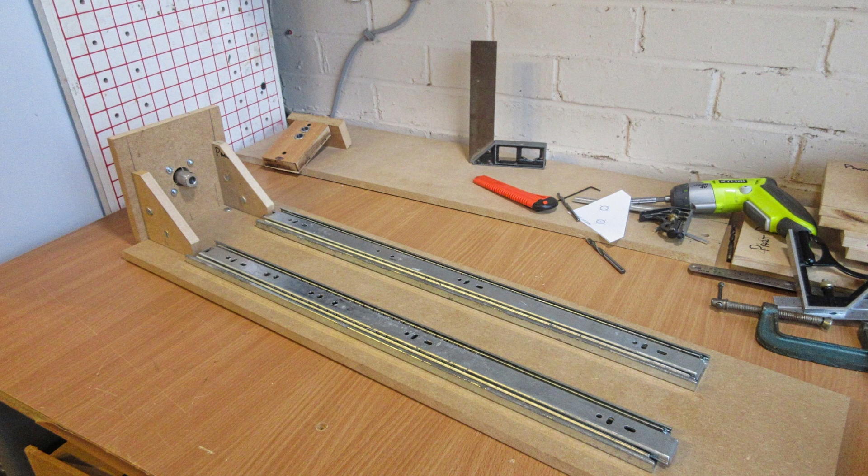You soon find you spend more time on the software. I always say to people getting into this side of things that building the machine isn't that difficult, because once it's built, it's there. Where you spend 90% of your time afterwards is in the software, getting the design how you want.

So in this video, I'm going to show you how to use DevWing Foam. We'll actually make a flying wing, but a slightly different one this time, because I've got tutorials on flying wings done with the older software, and I'll put a link to that if you want to have a look as well.

So I've been flying radio controlled planes for about 20 years now, and I've got all sorts. You might have seen some of my videos before with the sort of things I've been flying, from airliners to little Depron models.

Through the years, what I've found is that I get more enjoyment from the models I've actually built myself from a kit or done from scratch, like my Hawker Hurricane, which was completely done from scratch in foam, and a few other models as well.

My VC-10 airliner was another one that was a big project as well. Quite challenging projects, but very rewarding when you see the things fly.

When you buy a kit, put it together and fly it, you do get some enjoyment from it. Personally, I don't think you get the same sort of buzz from it as something you've built yourself.

So in this tutorial about DevWing Foam, what you're going to need is a CNC foam cutter, using a hotwire here to cut through the foam. Now, if you haven't got one, I've got a whole video series on how you can build one right from the start.

And it's not as expensive as you might think. You can probably build this foam cutter here for about $200 US, or about £160 UK.

And if you've got some parts already, probably even cheaper. You don't have to do it exactly like this. I mean, I've got plans for these, where there's a small charge on the website for the plans.

But a lot of guys have put their own interpretation on it, and some of them are using a lot of 3D printed parts now. So there's a builder's gallery on the website you can have a look at, and there's some really interesting takes on the design there.

So why would you use DevWing Foam, which isn't a free program, when there are free options? Well, I've used them all. There's one called Wing Cutter in G code, I think - have I got that right? I'll put the right name up for it anyway.

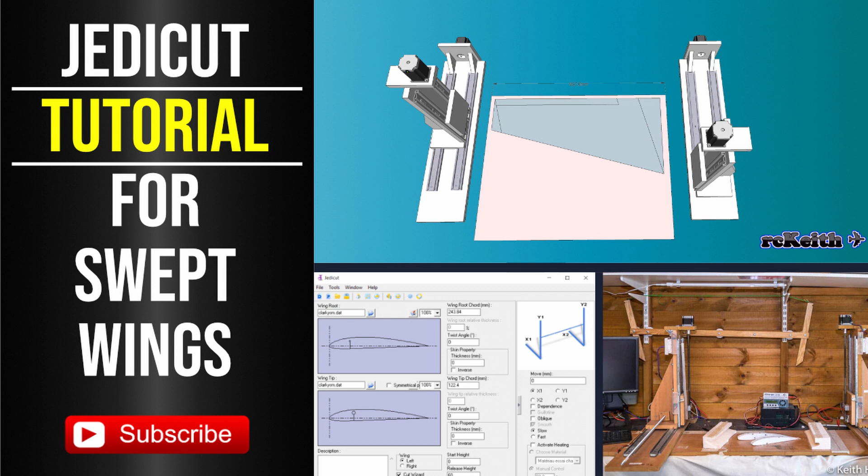I put the free ones on my YouTube channel because not everyone has the money to pay for it, and if you do want to do something like this, the free ones are good enough to get you going. And once you see what they can do, you might think, well, perhaps it is worth buying the paid versions.

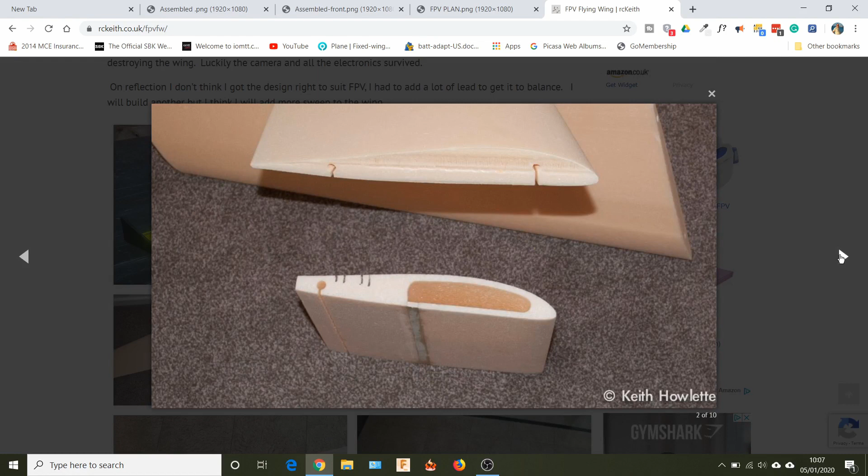So what I did then, I built a bigger wing, and this was the build of that, and it came out quite well actually. You see the carbon rods there, and it going together, using my favourite covering method, brown paper as usual.

But the only problem was I don't think I got the design quite right, and I don't think the wings are far enough back. Although you can't see it on any of these pictures, I had to put a load of lead weight up the front to get it balanced. I got the battery as far forward as I could, and then I still had to have a massive piece of lead weight, and it never did fly very well.

I even tried a Hobby King gyro on it. So after the third flight, I smashed it up completely. Luckily, the FPV gear survived.

I thought this time I'd try and have another go at doing this, but with a slightly different model with a better design. So this is what I've designed up, and the wingspan is about 950 millimeters. I think that's about 38, 39 inches, something like that.

And it's got this center section here, and it's using two different aerofoils. So it's in three parts: we've got the outer wing sections, the middle section here, and then this section here. Now this section, the white section here, that's because we're transitioning from one aerofoil to another.

So in the middle we're using a Clark Y aerofoil, and that's to give us a bit more room on the inside to get batteries and flight controllers and things in there. And then it goes on to a flying wing.

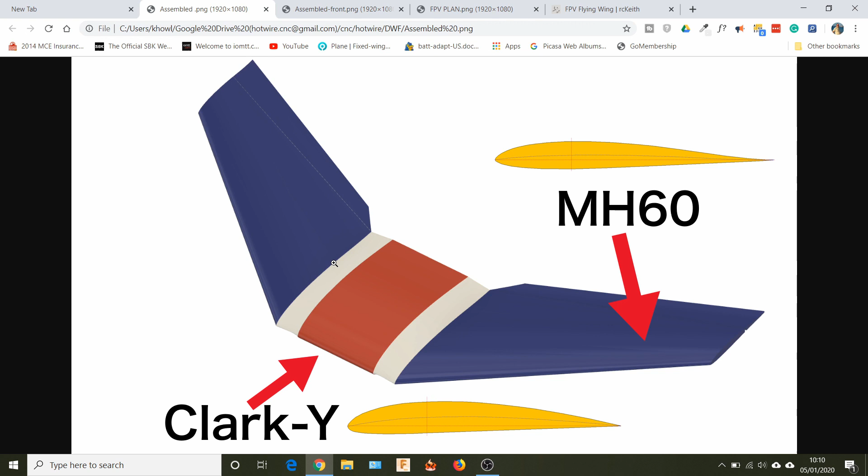So what we have to do in DevWing Foam, we use the Clark Y on the inside, and then the MH60 on the outside. If we have a look at the front, you can see that there. So we've got the MH60 there, and then we're transitioning up to the Clark Y. If you use the MH60 all the way through, there probably won't be enough room to get any gear in it.

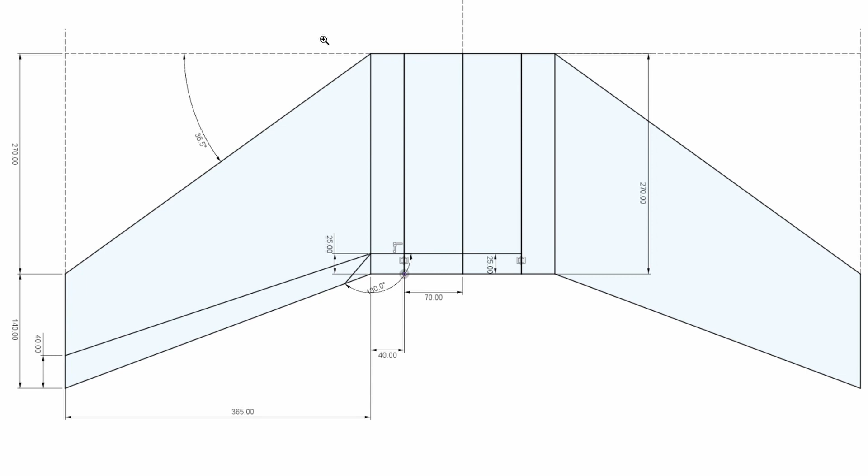So this is the actual plan for it. As you can see, all the dimensions there, we'll be using these dimensions in DevWing Foam to design the wing.

So the other way you can do it, if you want to build a particular aircraft, and one I've been thinking of doing for a little while, I don't know why it just appeals to me, is the Grumman A6 Intruder. I'll get a picture of that up. So this is the Intruder, and what we'll do within DevWing Foam, I'll show you how to use an image to get the wing dimensions. Hopefully that's going to work out quite well, and we can start to model it up in DevWing Foam.

So let's get started with DevWing Foam. What I'll do first of all, I'll just show you what will happen if you start DevWing Foam without a license.

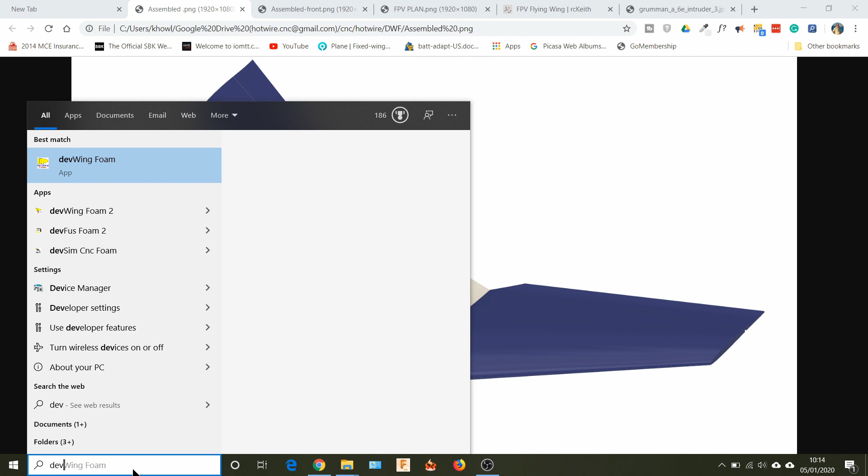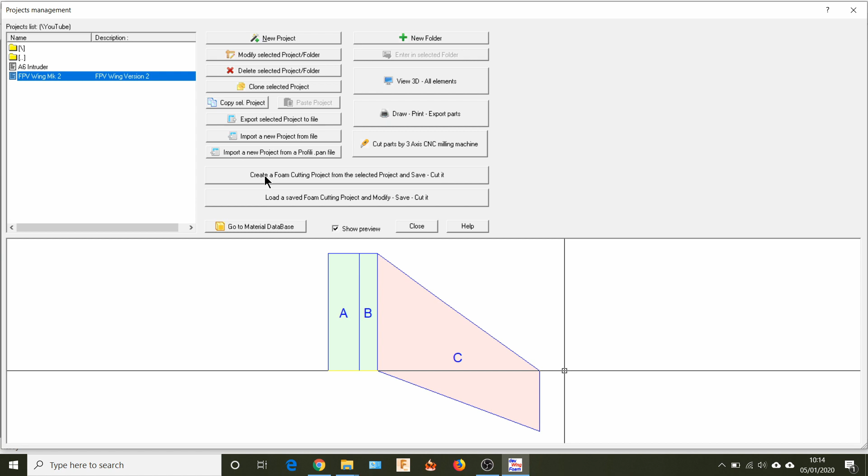So it's starting up and it's checking for a license first of all, and then it comes up here, and you can use almost everything within DevWing Foam. But the only thing you won't be able to do is generate the G code, and there's a few exports you won't be able to do either. So all you do is press continue, and you can follow along with this video tutorial even if you haven't purchased a license. Everything will work apart from when we get to creating a cutting project.

It does cost a bit, but personally I think it's well worth it when you consider how many models you can make. So all my licenses are on that USB key there.

When you get a new license, as you put the license in, it saves them onto this USB key. I didn't used to have that when I first started, and after having one or two computer failures, it's better to have one here. If you've got DevWing Foam on another computer, so a big desktop and a laptop, so long as you plug that in, DevWing Foam will work on either. You can't run them simultaneously, only on one at a time.

So we'll plug it in now. All right, there we go. So she's in now. You can see it's recognised it there.

So this is the latest version of DevWing Foam 2. This version was only just released - I'm recording this in January 2020, so it was released in December 2019. It's very new, and there's some nice features from the original version, DevWing Foam. I think it's really good, which I'm quite impressed with.

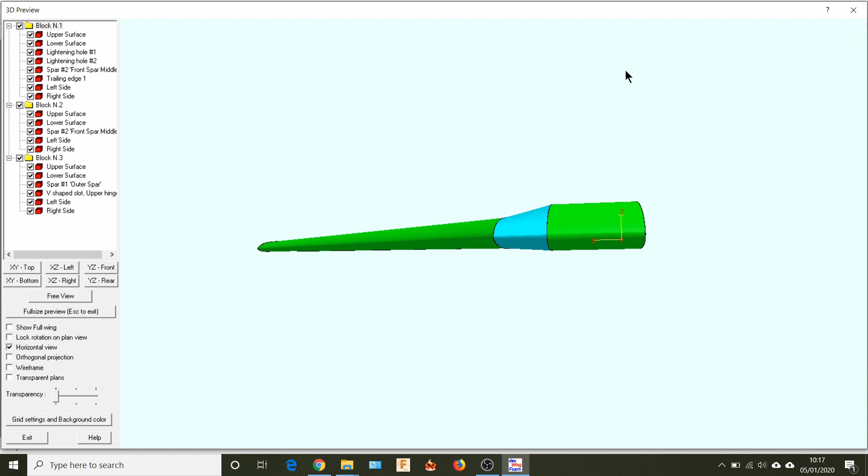So let's have a look at this flying wing, and we'll go into the 3D preview. This has changed from the last version, and you can see what we've got there. This is what we're going to be modelling up. I've already done it once just to make sure everything works, so what we'll do is we'll go through it again.

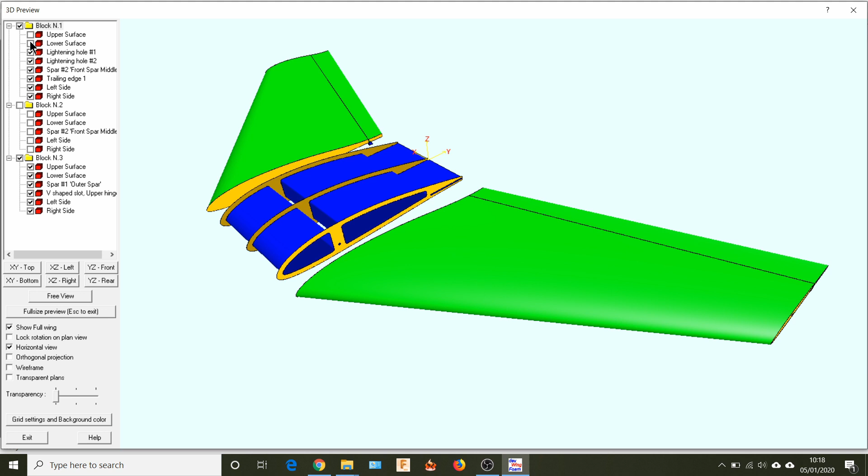The other thing you can do as well, which I quite like, is show the full wing. So if you click on full wing, we've now got the full wing there. And then you can take parts of it off as well - so that's our middle section there. You can take various parts off, and you can see the spars going through the trailing edge.

I think that's a real big improvement from DevWing Foam. Stefano's done a real good job on this. Right, so we'll come out of that.

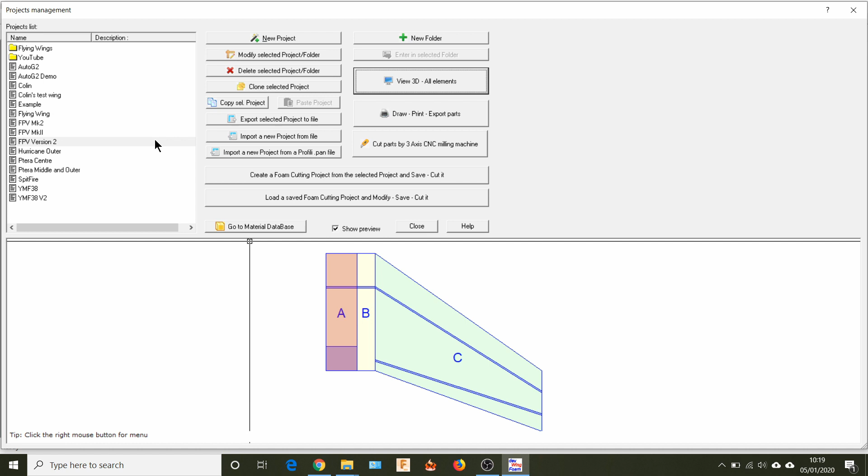A couple of other things that have changed as well - we've also got the ability now to import a project from Profili. Profili was the original one I first started with, and the majority of my wings have been built with that. The FPV wing I showed you earlier was all done with Profili, and it was good for its day. But there's a lot of improvements within when we went to DevWing Foam, and now we've gone to DevWing Foam 2, there's some really good improvements as well.

One of the big improvements to DevWing Foam 2 is we've now got the ability to add a folder. You can see I've put a couple in here - I've got flying wing in there, and I've already started designing an FPV racing wing.

I don't know whether you guys have seen this - it's what they call the spec wings. It's for FPV racing, I think it's quite big in the States. I don't know if it's taken off in the UK yet, but they're all standard spec wings that have to be built to a certain dimension. So I'm going to have a go at building one of them, just for the fun of it.

So I've created a folder for YouTube here to keep me YouTube stuff. What we'll do is start off first of all with a new project. Even though I've got this project here, what we'll be doing as well is referring to the dimensions - I'll be referring to this dimension. So let's go back - create a new project.

When you first open up DevWing Foam, you'll see these lines going across on the various windows. Red means it's mandatory, so we have to put some settings in this page. We can't go any further until we've got some settings in there. We've also got this thing called expert mode, which you can have on or off. If it's off, you have to go through a wizard mode and go through each part.

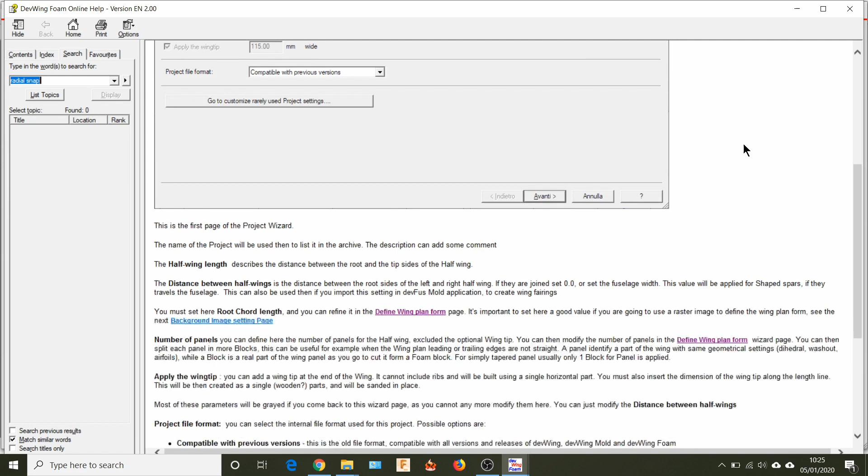So we don't really need that. There is a help on it, so the help's quite good as well. If we bring the help up, and if we go down: distance between the half wings is the distance between the root sides of the left and right half wing. If they are joined, set 0, 0. Or for fuselage, this value is applied for shaped spars if they travel the fuselage. So we're not going to need that. As you can see, the help's context sensitive, so wherever you are, bring the help up, it brings up the relevant help.

So the root chord on this is 270, I think. Let's just double check. Yeah, 270. Put 270 in there. Number of panels.

We can alter this later if we want, but we've actually got 3 panels on this. So the panels are like the wing sections. The wingtip, we can apply a wingtip, but...

This is if you've got a CNC router and you want to cut the wingtip out of balsa. So I may cover this in a later video, but for this video, to keep it a reasonable length, we're not going to cover that. So we just take that off.

And then we've got the project file format. So we can have compatible with previous versions or fast saving format. I'm going to stick with the new fast saving format. This is new in DevWing Foam 2.

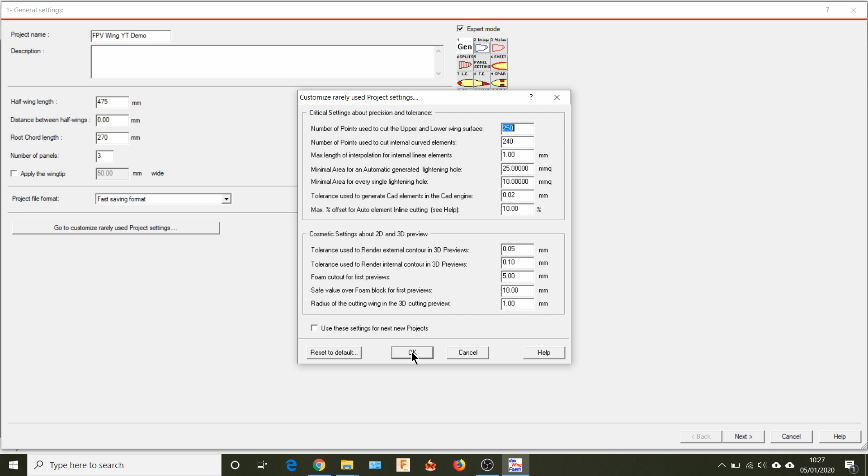Then we've got go to customize rarely used project settings. You'll see this a few times in the program. And as I said earlier, there's a lot of things in here which I've never touched, even on the old version. I think it's basically the same on the old version, and I've never touched any of these. I find with DevWing Foam, most of the default settings are pretty good. They've done a good job on that.

So if we do next. Now what I'll do is once we get a little bit further into this wing, I'll come out of it and show you how we use the image option with the Grumman A6. But we'll just skip this for the moment. So now we've got our 3 panels here.

So on this screen, what we need to do now is go in and set the correct dimensions. Basically all it's done is just split it up evenly in 3 parts, and as you can see, it doesn't really look much like our wing. If we have a look at our wing, it doesn't look much like our wing at the moment, but that's quite easy to sort out.

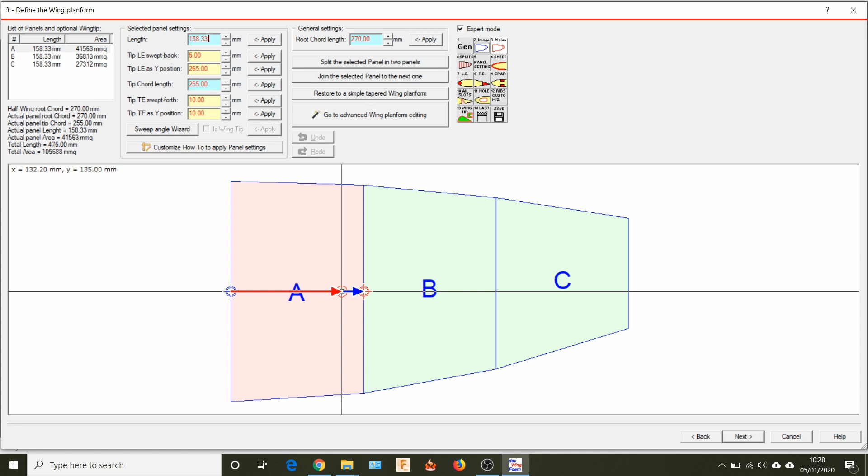What's good about this as well, if you go into each of the dialog boxes, so if we go into panel A, go to the dialog box there, it shows us where we are, and we can actually adjust this graphically if we want to. So if we just click on it, we can pull it back. If you had an image underneath, you could line it up with your image. So that's brought that back to there.

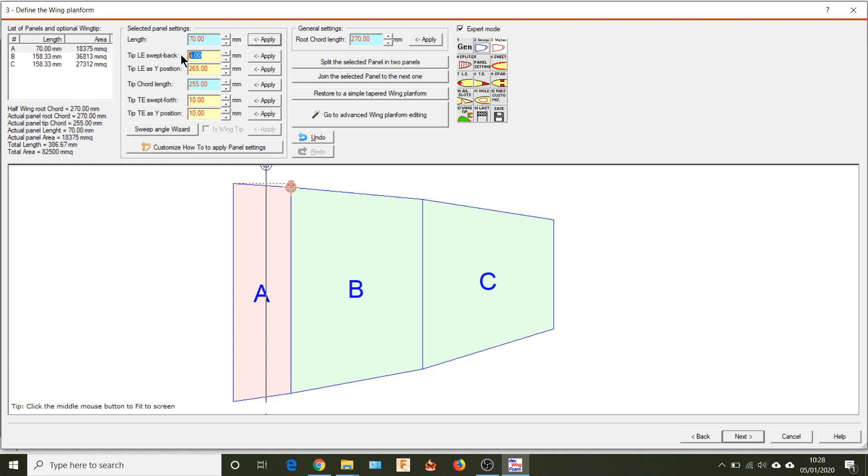And I think on our drawing, that distance is 70, so we can put it in manually. I'll put 70 in there. The sweep back, you can see the sweep back there, and we've got no sweep back, so I'm just going to type this in manually. And then the tip chord there, that's going to be the same because this bit is straight, so we'll put 270 in there.

So then we've got our first straight section. Then this next section is very similar, so we'll go on to B. This section is 40 millimeters. The sweep back is 0 again - well, we need to apply that, don't we? Yeah, sweep back is 0. And the chord length is 270 again.

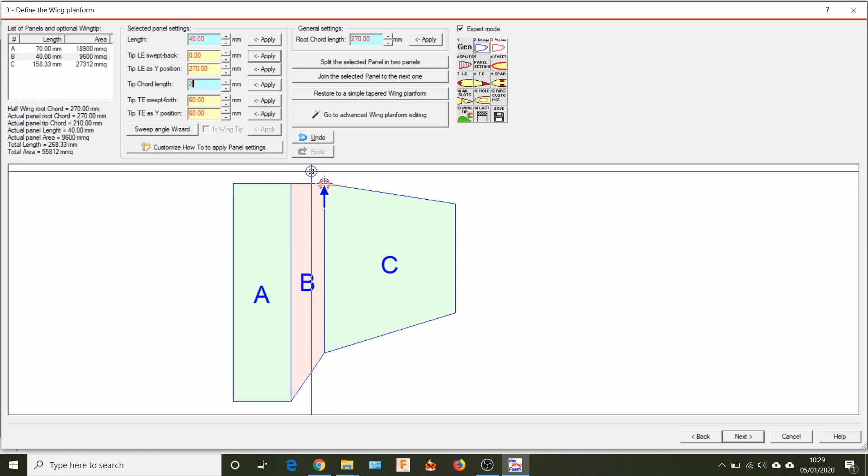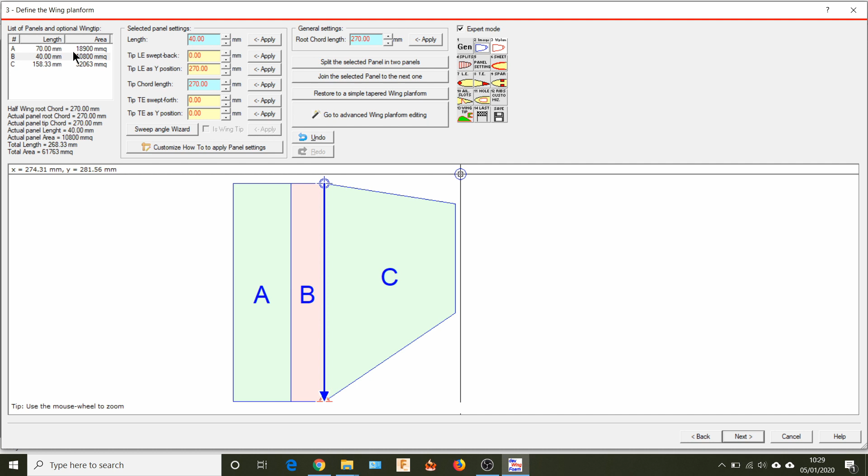So looking at our diagram, what we've done, we've just done these two parts here, the two middles. So what we're going to do now is come on to this section here, we'll move on to part C. Now the distance of that - you don't seem to be able to go any further than the end of it, so what we'll do there, we'll put it in manually: 365.

There we go, so that's our sweep back. We can do it two ways - we can use the sweep angle wizard there, so we can put the angle in there if we want to, or we can use the dimensions there. From our drawing, the sweep back is 270 again - it's actually the same as the root. So we'll put in 270 there. Apply that. Yeah, now it's starting to look like our wing.

And the chord length on there, I think is 140, is it? Yeah, 140. So we go in there, 140. Oh, come out of that.

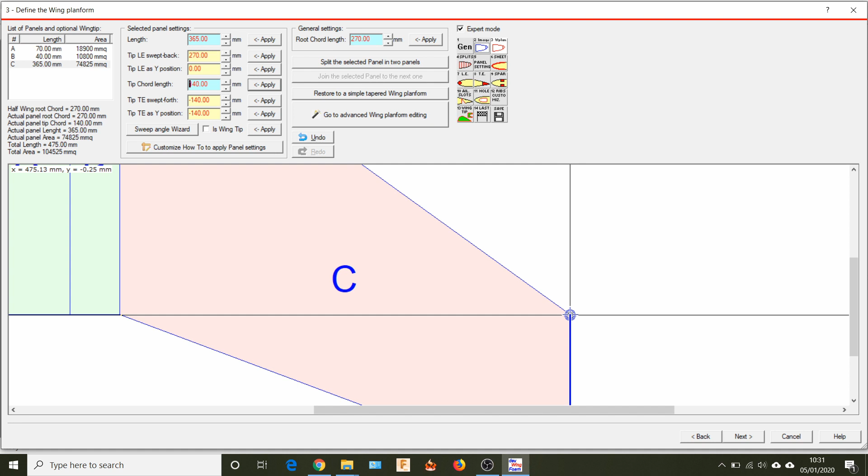So there we are. Now the other thing that's quite good with DevWing Foam as well, you can actually measure as well. So if you wanted to know what the total distance was, we can zoom in a bit as well. If we do, just click - if we hold the shift down, it puts it into orthographic mode. And come across - right, there's no snapping on this, that's the only issue. I think we're about there. Yeah, so it's at 474 - if I was a bit more accurate.

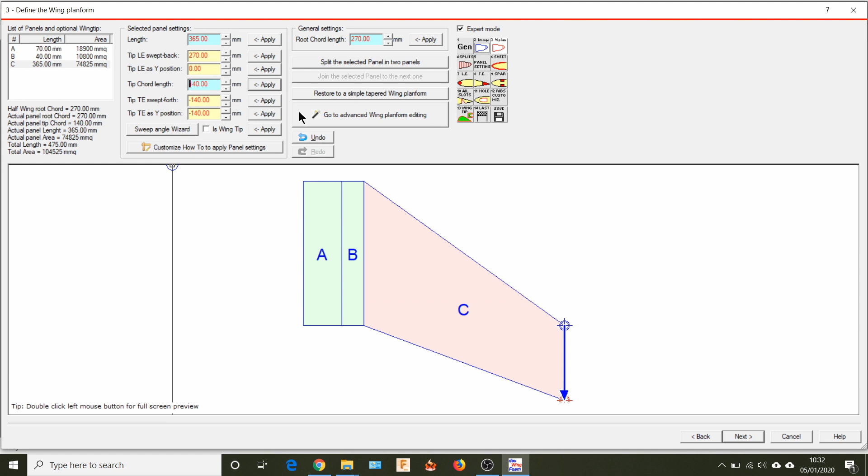The other thing we can do here as well, we can split the panels into more panels, split into two panels if we wanted to - say you just wanted an aileron on. So if we're on panel C, and we just tell it to split into two, we could have two panels then, and say you wanted the aileron just on this outer section. When we come to do the ailerons, you could put that in there. I'm just going to take that out - I think we can do an undo there.

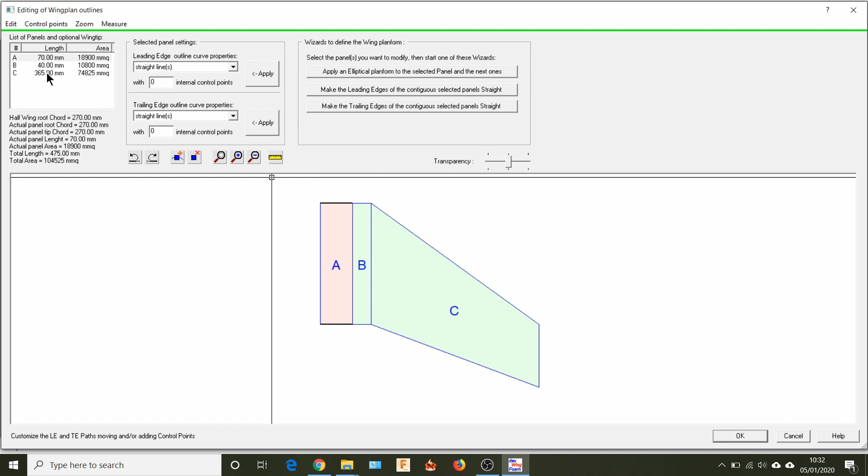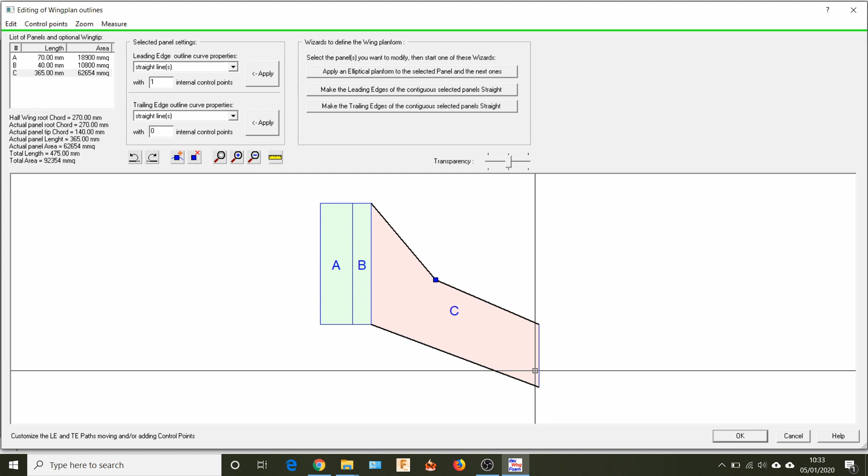And the other thing we can do as well, if we've got quite a complex wing, we can go into advanced wing planform editing, and we have these nodes up here. So what we can do is select the panel, click on the node, and then we can put it there, so we've got a funny shaped wing. Let's come down a bit. Yeah, so we could shape our wing like that if we wanted to. This works better if you've got an image underneath, so it would be showing through and we could line it up with that. But we don't need it on this one, so I'm going to undo that. No, so okay, cancel takes out the whole thing.

Right, so the other thing that's quite good here, it's giving us a total length here as well. So when we measured it, we've got a total length, and we've got the total wing area as well, which might be quite handy for working things out.

So that's all we really need on this screen.

I'm going to leave it at 500, half wing length 500. Let's put the root chord about 300, something like that. We'll do 2 panels on this. We don't need the wingtip here.

So what we need to do now is set an image. We'll get the image. As you notice here, there's various image formats you can use. You can even bring a DXF file in, a CAD format. But the only thing is it will bring it in as an image, so you won't be able to snap to any points or anything. So we've got lots of different options there for bringing files in, and we can even bring a DevCad file in as well. Right, so we'll open that.

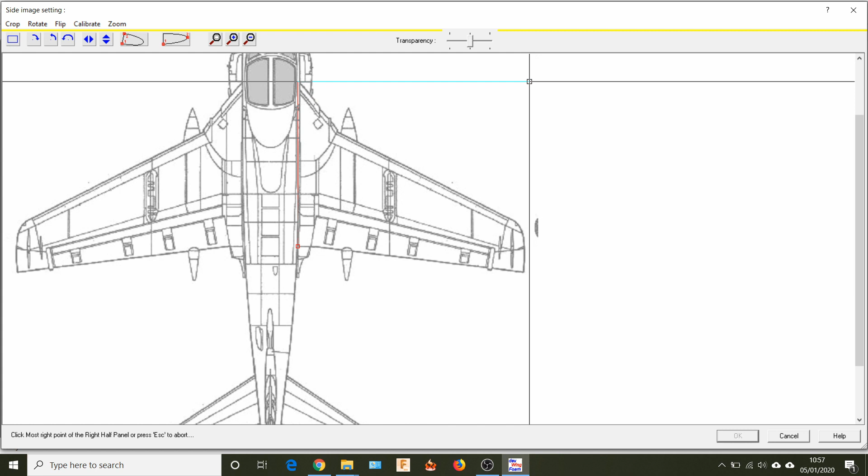So what we need to do now is this option here, and it says down here, click the root of the trailing edge. You can zoom in a bit. Round about there, and click the rightmost point of the right half panel. So I'm going to go about there somewhere. And that's our dimensions there.

So if we go OK, you can see it's just put these in by default. So what we need to do now is go into our program and adjust them like we did before.

So you can see it's not giving us much on the root, so let's just alter the root first of all. Now the root chord, this is where the measuring comes in quite handy. So let's go there, hold shift down, go up. That's saying about 360, so let's try 370 there. Oh, wrong one. 370, apply. That's looking better.

And then what we need to do now is adjust this width. So this is where we can use the graphical size, which is, if we pull that over, line it up somewhere around about there. That's looking pretty good there. And then, I don't think this allows us to go any further for some reason.

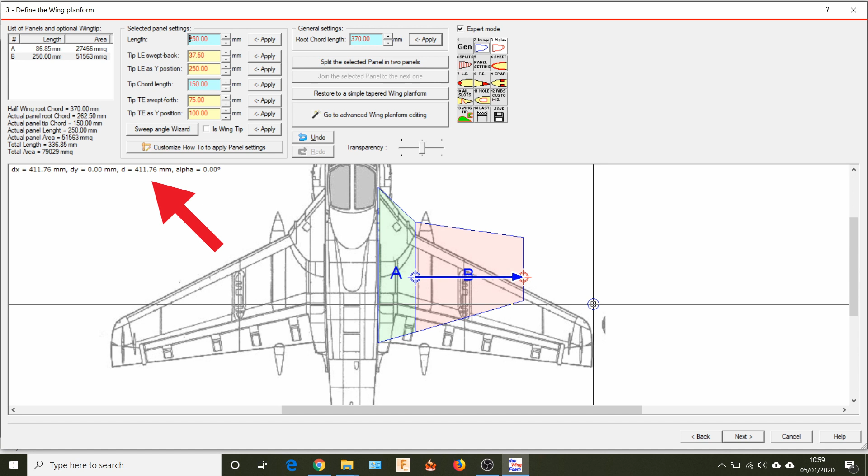I don't know whether that's a bug, but let's measure that distance. So from there, hold the shift down, keep it straight, and about there. So what we've got there, 411, let's try 410 for that. That's not looking too bad.

Right, now on this panel A, we can see that this position here is not quite where we want it. So let's go to the sweep back, pull that down a bit. That's looking better. Right, the other thing we can do now is use the sweep angle wizard to get the angle of this. So let's just go near there.

Put that along there. That will give us an angle of 26.76. So what we'll do then is on panel B,

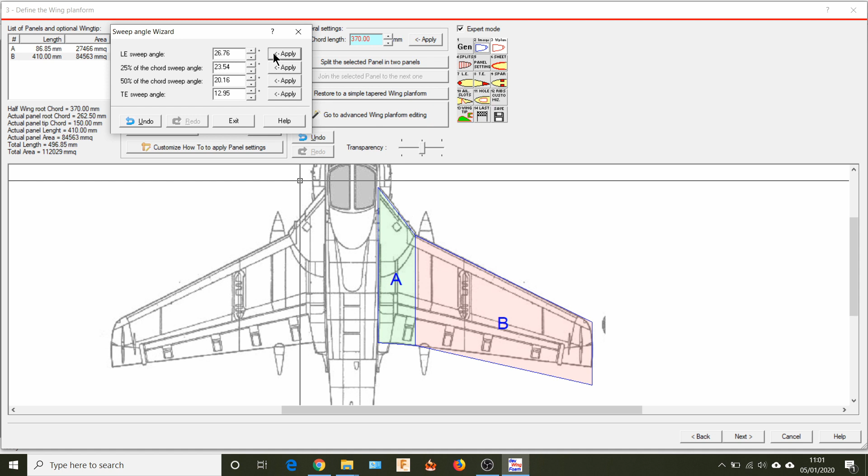we'll go to the sweep angle wizard. If we put 26.76, apply that. There we go. That's just about brought it right. It's not looking too bad there.

So we can go exit now. Now we need to get this tip chord the right distance. I think what we'll do is we'll use a measure again.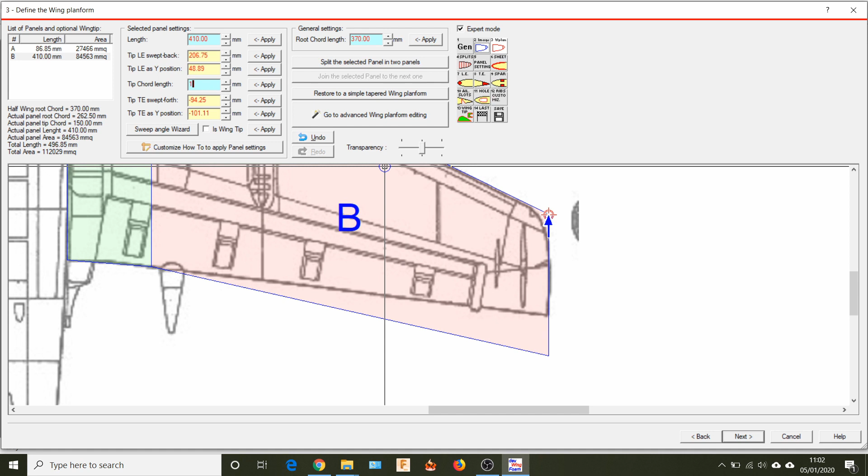We'll click on there, and we'll come down to the shift down. About there by the looks of it. It looks like we've got a distance of 109, so let's go for 110 on the tip chord. And there we go.

That's how we get the dimensions if we're using an image. So that looks fairly good like that. That's quite a good way of getting your dimensions. So if you've got an image of a particular aircraft you're trying to model, you can get all the dimensions like that. So if you haven't got a plan to work from, that's a good option. And as you can see, it works fairly well.

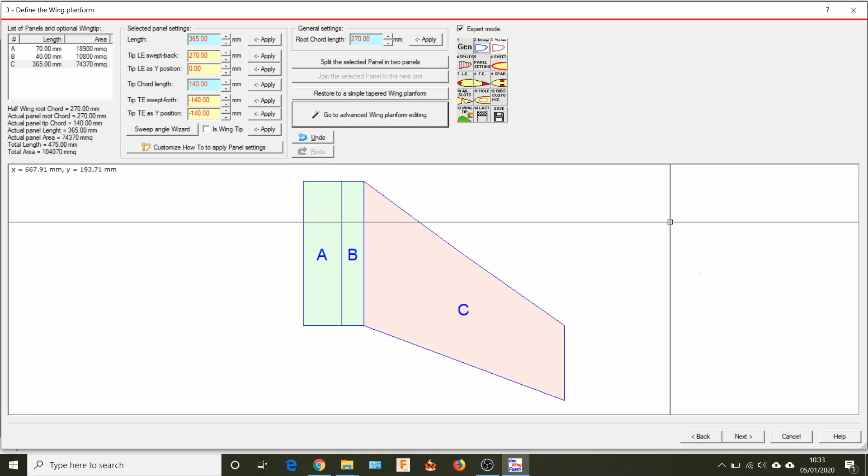So we'll go on to the next. If we wanted to split our wing into more than a few panels, so say this was like a Spitfire wing, which was more curved - with a hot wire cutter, you can only cut straight. So what we'd need to do is make lots of little panels, then join them together.

And there's a wizard there to create the split. You can go add split, space by distance, or evenly spaced. There's quite a few options there. But again, we don't need it for this section.

So we'll go on to the next one. What I'll do is I'll just do a save as well. So we now got that saved just in case.

So when we come onto the aerofoil sections, what we need as a minimum is a root aerofoil and a tip aerofoil. So we need the root aerofoil up here and the tip aerofoil down here on the last panel section.

Because our wing design is a little bit different, we're going to have to put them in individually. So if we select the root aerofoil, we're on panel A there, so we're going to be selecting the root aerofoil there.

DevWing Foam has got loads of aerofoils in, so I'll take the filter off there. You can see by how long it's taking to load up, there's quite a few aerofoils there. It's running a bit slow as well because I'm running OBS to record this video.

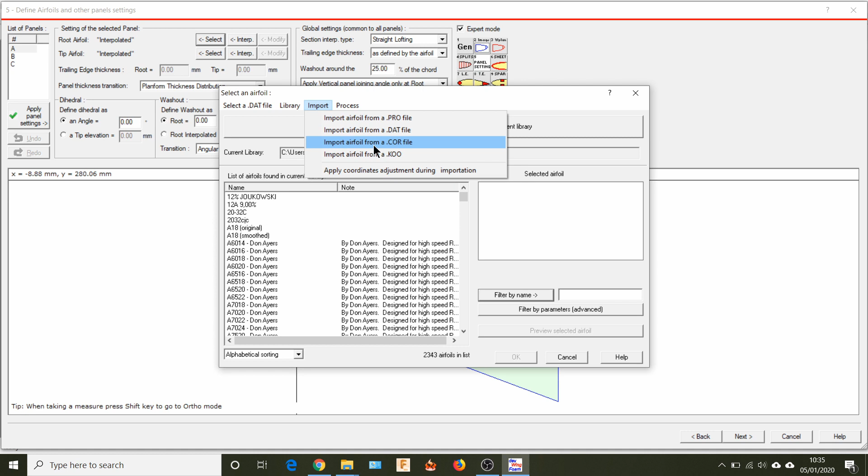And we've also got the option to import. So if you wanted a particular airfoil that wasn't included, you can import it in various formats. That format's probably the most common. There's quite a few websites where you can get these from.

So what we're going to need for this one is a Clark Y for the center section. So I'll select filter, and I'll select the Clark Y. You get a preview of it, and you can actually go in and look at it in more detail and look at all the stats for it.

The other thing you can do is filter by advanced parameters as well. So if you were looking for a particular thickness or camber, you can go into advanced and do that. I don't use that very often. So we've selected Clark Y.

So then the tip aerofoil - now the tip is referring to the tip of part A. So go select. OK for that.

Oh, I always forget this. You have to apply the panel setting. Apply the panel settings. And then what we want then,

on B, the root aerofoil is a Clark Y because it's following on from before, but the tip aerofoil - that's where we need to select MH60, with the setting interpolated. If we were just using the same aerofoil, we could put the root in and the tip, and it would work all the ones out for us, so we wouldn't have to go in and specify each one. So we're going to use interpolated there.

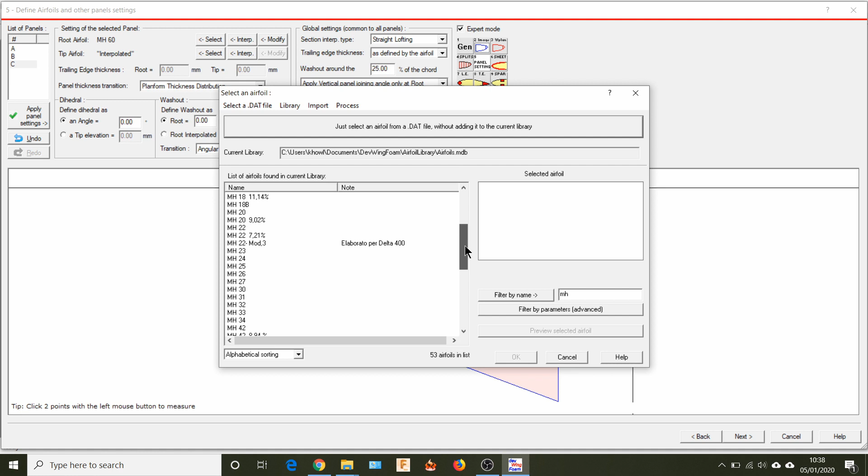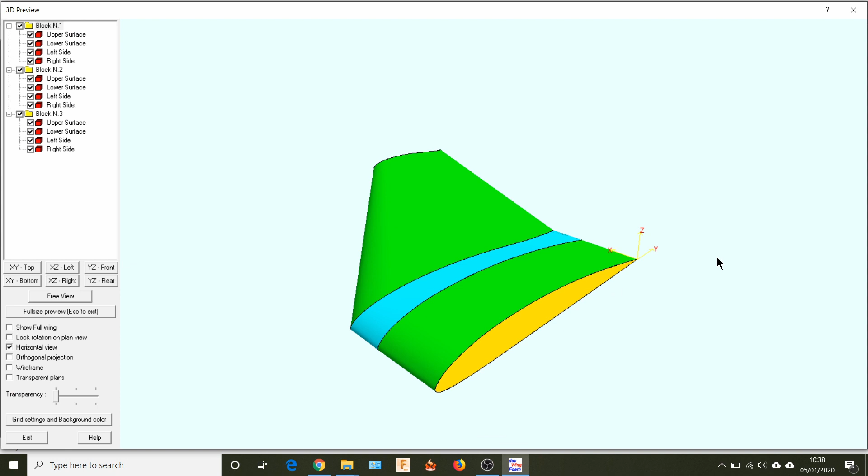And we'll apply it this time so I don't forget. So we've now got our aerofoil, and we can do a 3D preview now. So there we go, we can see how our design is going to work. So we've got our MH60 there and our Clark Y there. That's going to give us this transition to the flying wing aerofoil, and this should give us the space inside. We're going to be putting spars and lightening holes in here as well as we go on. Let's just show the full wing. Yeah, there we go.

Right, some other things we need to do here as well. On my flying wings, I always put washout on the tip. So let's go to the tip aerofoil there. So that's our tip aerofoil. And these flying wing aerofoils, they've got something in them called reflex. I don't know, you can just see it at the very last bit, it tips up very slightly. So on a flying wing, it will tend to nose over unless we've got some reflex in it, because we've got no tail to counterbalance the wing.

You can do the reflex by using the ailerons as well, by putting a little bit of up in the ailerons, but we're going to do it in the aerofoil here. I also put some washout in as well on my wings, they seem to work quite well on that. So I've just ticked the box there so you can actually see it, and I'm going to put -2 in here. If I apply that, you can see the actual wing that goes up at the back end to give us more washout. So the washout is designed to stop swept-back wings stalling as you get slower.

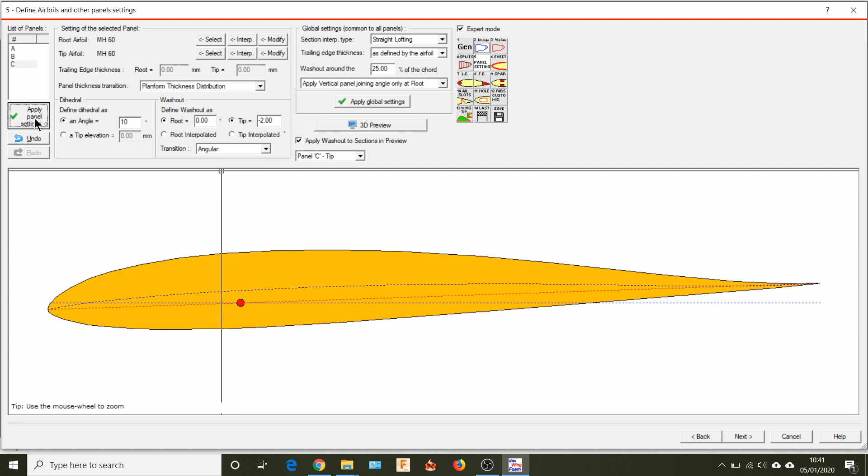So another setting we've got here is dihedral. If you want some dihedral on your wing, let's just put something a little bit ridiculous. We'll put 10 degrees in, and we'll apply that. And then if we have a 3D preview, you can see it's moved it up quite a bit anyway. We'll do a 3D preview now. So you can see now that we've got quite a lot of dihedral there, which I'm not sure whether that would fly very well like that, but it just shows you what you can do.

So you can either do your dihedral by angle or tip elevation. But what we'll do is we'll take that out, because we don't need it on this design.

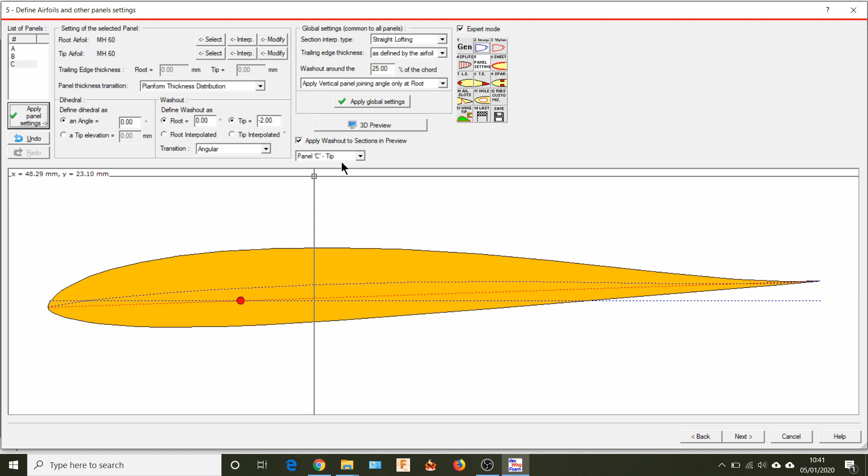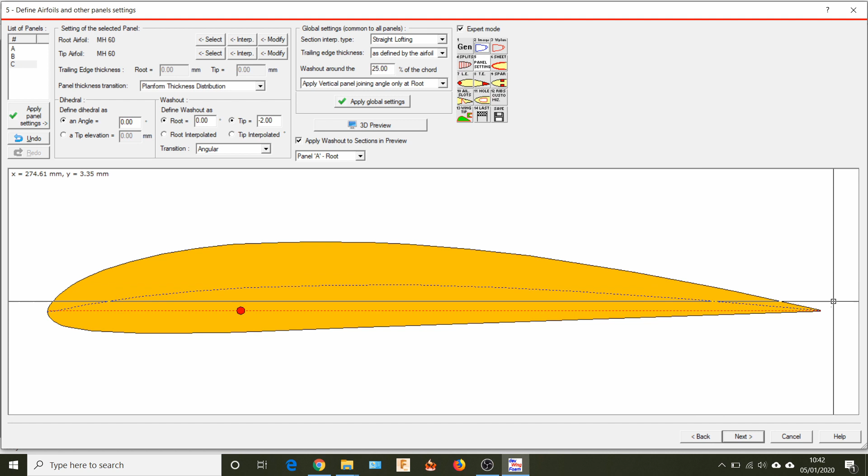And the other thing I like to do as well, if you notice - let's go back to the root - if you notice down at the tip of the aerofoil, it goes very thin there. And what tends to happen with a foam cutter, as it gets down here, it can tend to eat away the very end of the foam. In the past, what I've done is made the aerofoil actually a little bit longer to allow for that. But we've got a good setting on here now, and we can set the trailing edge thickness.

So define it for each panel. If we go on to panel A, we've now got this setting here. I think what I've worked it out to is, in the design, it's 6mm there. So if we apply that - and you see at the back there, that's now come up - that's going to allow us to get a mount in for the motor as well.

So on panel B, it starts at 6 because it follows on. What I'm going to do there is put that to, let's go 5 there. Apply that. And then on panel C, we start at 5, and I'm going to go down to 3, so it should taper out towards the end.

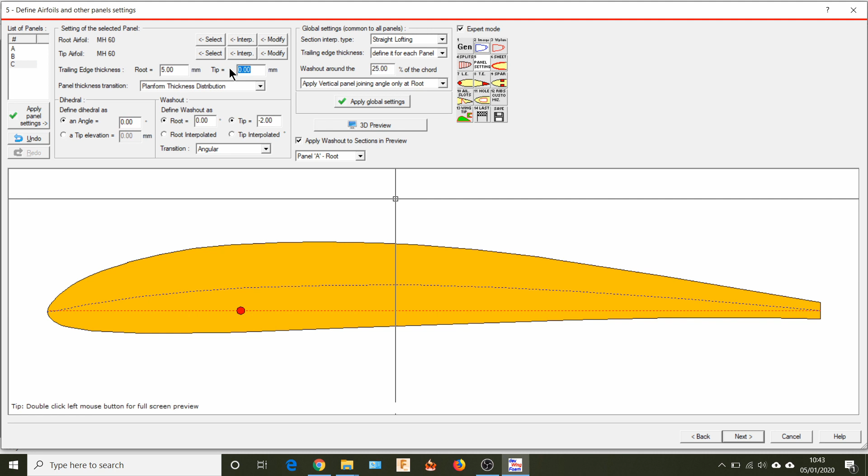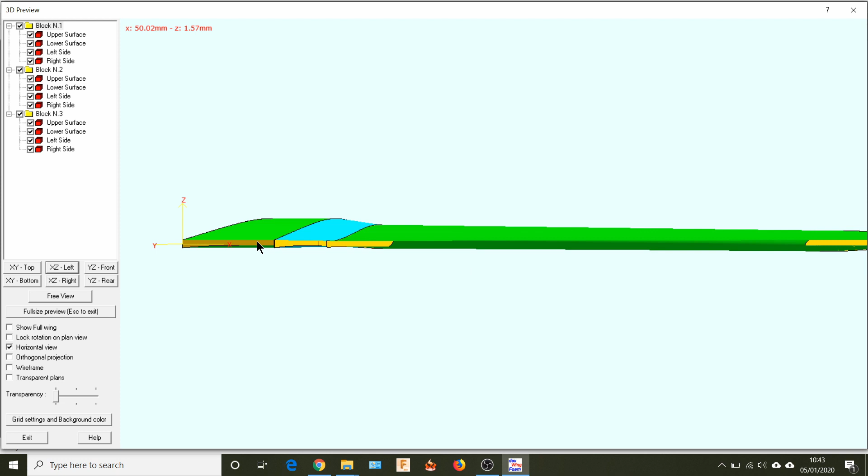So if we look at our panels there, you can see we've got a little bit there - looks quite a lot, but this is only 140mm long. So if we do a 3D preview now, we go in there, and we can see it looks a little bit thicker there, and it goes quite - hard to see on this - but it's going out thinner there. That's about all we need on it.

Some of these other settings here, lofting and that, are quite advanced settings, so I'll not go into them in this. So on the next section we've got sheeting. Quite a few of the glider guys like to cover their wings in some sheeting, and they usually tend to vacuum seal them as well.

So what you can do is, say we wanted some sheeting on the aerofoil here - so by default it's got 2mm in. So if we just add the new sheeting, we can put that on there.

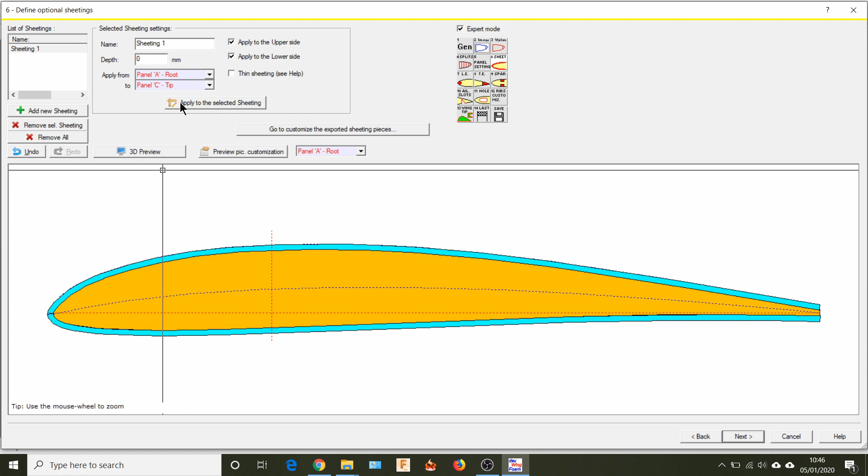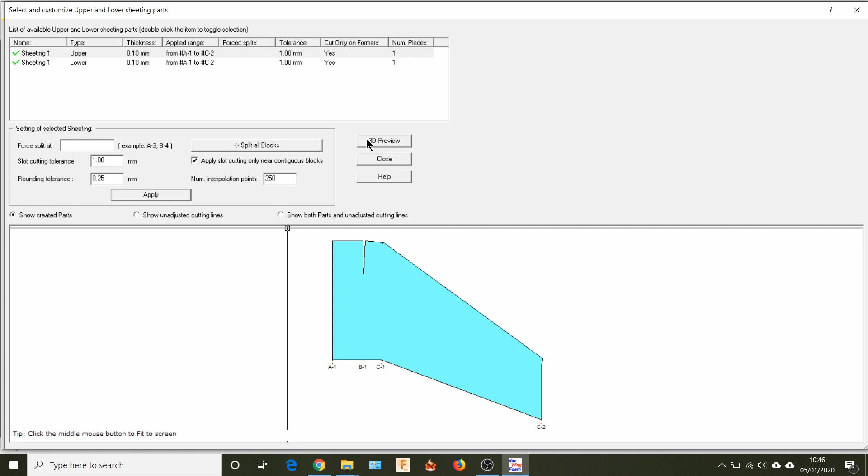One of the things you can do as well, which is quite handy - if you set this to 0, and go to customize exported sheeting, you can actually print these out. So if it was some film - I'm not sure why it's done that bit there, probably because it's curved there - that would allow us to cut out some covering.

Yeah, so that would be our sheeting on there. So that's quite a handy option, but we're not going to use it on this. I'll just go close to that. So I'm going to remove all the sheeting.

So that's quite a good option as well if you want to put some sheeting on there. If we go to the next section.

So this is where we can put leading edges on the wings, and we've got various options there. We can put a rounded section, some stock, V-notch and a strip. Not actually going to use it on this wing.

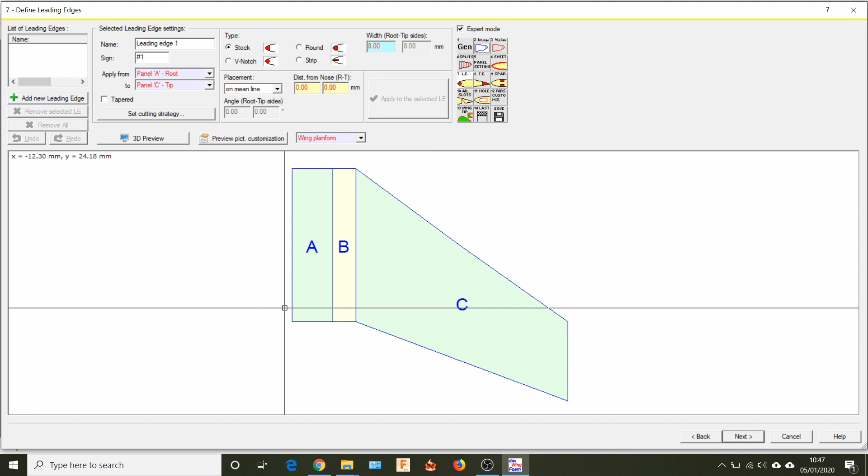Leading edge, but I'm going to put a little trailing edge on the back here to help with getting the motor mounted. So we'll ignore this section.

An option we've got, I'll show it on the next one. So what I'm going to do here, I'm just going to have a trailing edge on panel A. So we go there, panel A tip.

And then I'm going to use a strip here, and I think I'm going to put it in about 50 millimeters, because some of this is going to be cut out as well. And I think I'll leave it at 2 mil, 2 mil will be alright.

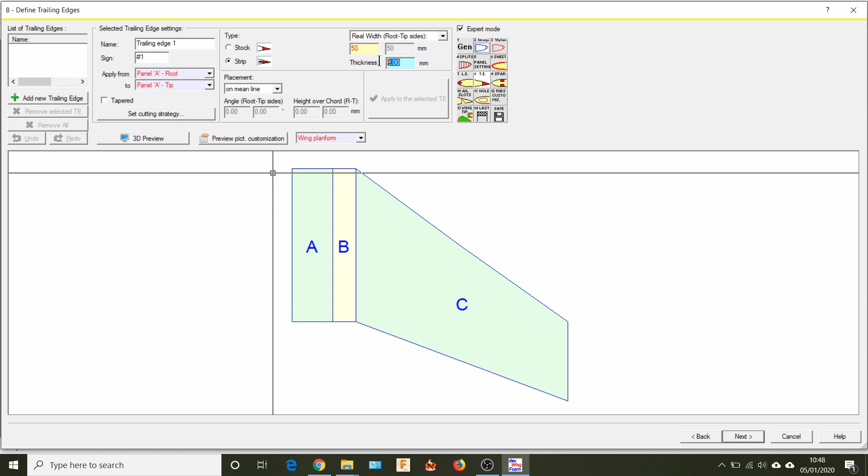And if we add trailing edge, and if we look at the, now you can see at the moment that's going up with this line here. So this blue line is called the mean line, and this red line is called the chord line.

So if we go to placement, we can change that on the chord line. And if we apply, see that's come down now.

We've also got the option to do it freehand as well. If we do it free, then we've got these settings we can do here if we want. But I'll leave it on the mean line because that makes it nice and straight there.

And if we do a 3D preview, we can see now that we've got our trailing edge in here.

So I'm probably going to use this to mount the motor. So I'm going to probably cut some of this foam out and use this bit of ply here as a support for mounting the brushless motor on the back.

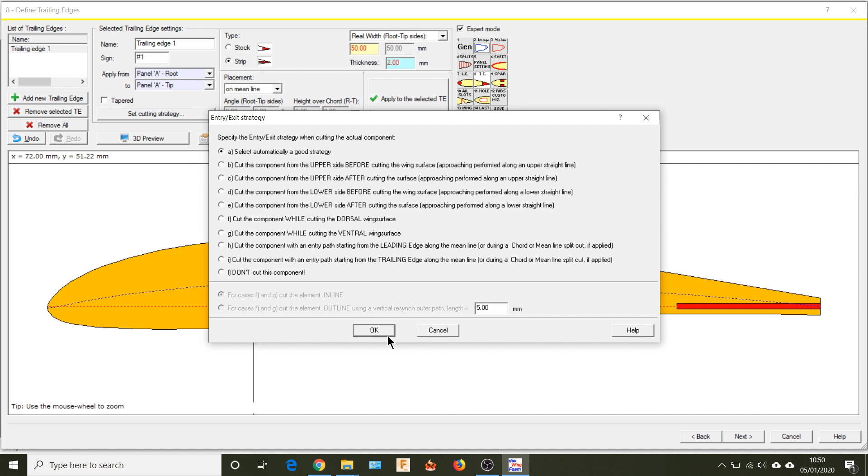The other thing we've got here is set cutting strategy, which you'll see on quite a few of these. By default, it says automatically set a good cutting strategy. Most of the time that works alright, but what I have found sometimes is you need to use one of these options here. But at the moment, we'll leave it as is, and I'll show you when we do the lightning holes, where we need to alter something on there.

So the next section is we're adding spars. Now you've got various options for spars using the wizard, but I don't think any of them are suitable for what we're doing here.

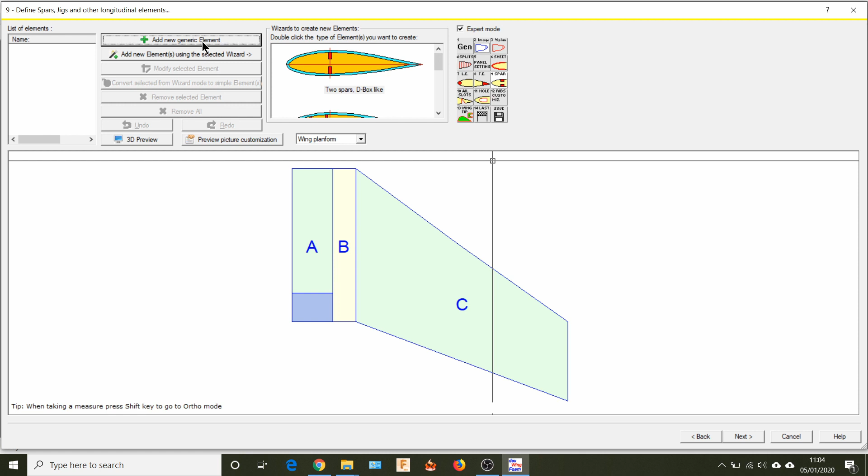So what you can do is just add a generic element. So I think what we'll do to start with is just put a spar on the outer section. And then call this outer spar.

And I'm going to use circle, and I've just bought some 4mm rod to use for this. We'll use a 4mm rod.

And this is where we want to place the actual spar. So for this actual wing here, putting in the maximum thickness is probably going to be the best place. But as we go further into it, we'll actually be using the other options we've got here, like distance from the trailing edge to leading edge, highest point, lowest point.

So what we'll do is we'll accept that. And what we do is update picture preview. You see now we've got a spar there.

So if we look at our, you can see where it's put our spar, which is on this dotted red line here. Now I don't want this open section here. So what I'm going to do is I'm going to take this insertion off.

And what will happen is that we'll just have a small cut coming in there, and then it will go around and do that for us. So I may regret that later if I'm struggling to get the rod through there.

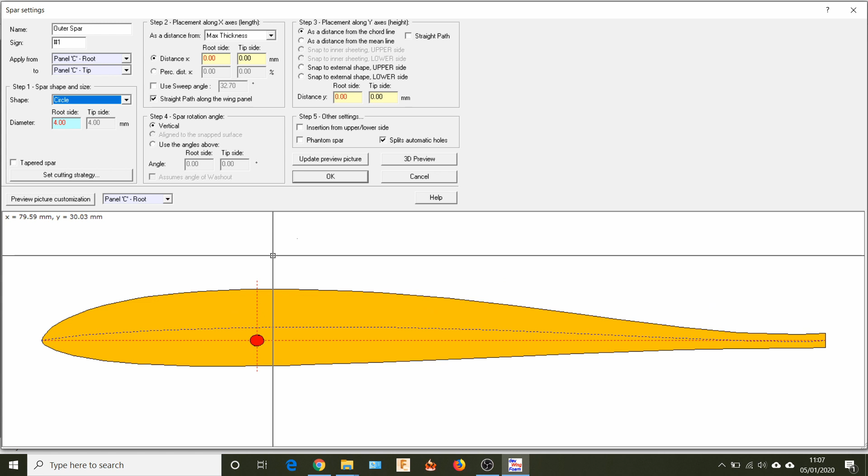So that's okay there, and I think for this first spar, that's all we need. We've got a first spar. Then what we're going to need now is some spars going across here.

If we add a new generic element, now this time we're going to go from panel A root to panel B tip. And the maximum thickness is going to be different now because we've got a slightly different aerofoil here. So I think what I'm going to do is I'm going to measure this so that they join up as near as possible.

So let's just zoom in and then click on here, get to sort of near enough the middle. So that distance is 75 millimeters.

So what we're going to do now, we're going to use distance from the leading edge, 75 millimeters, straight path along the wing panel. Update picture preview. Oh, we've got the wrong size there, haven't we? Circle, 4 mil.

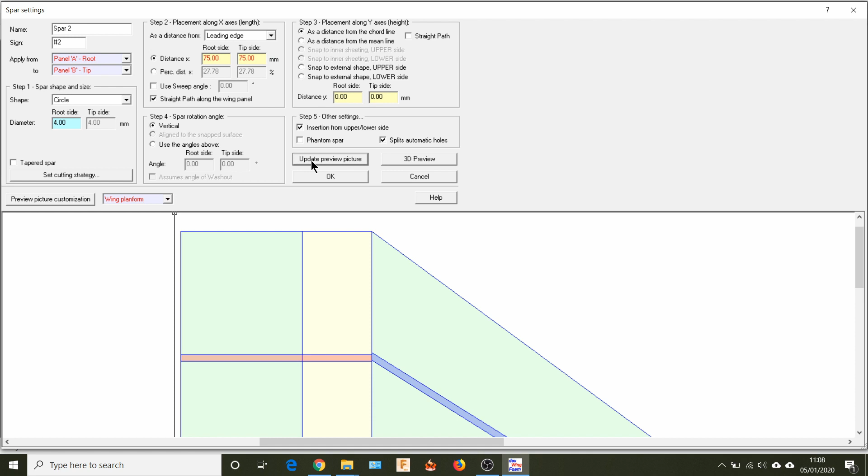It looks like it might be slightly off, so let's just bring it up a little bit. Let's try 73. 73. Too much, must be 74 then.

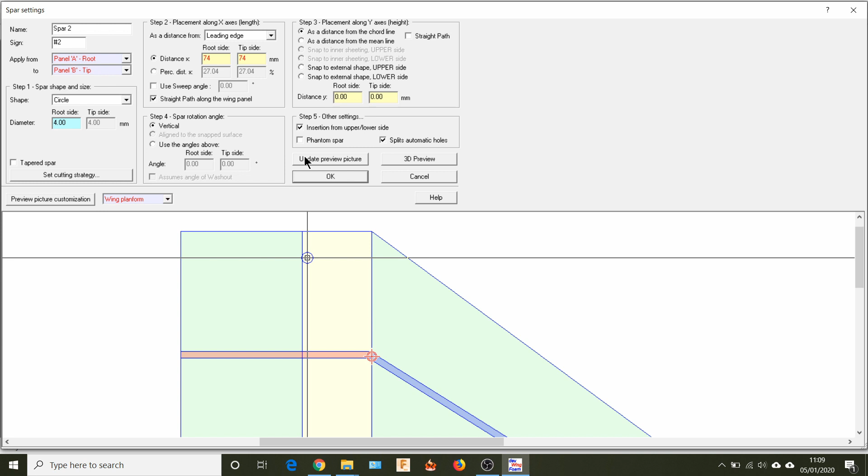Yeah, that'll do there. So what we can do is, when we're actually building it, we can actually join them together as well. So that's the front. And then what we're going to do now is we're going to put a spar that goes across all of them.

Now what we find is we'll get an error here because it won't like going across all of these. And now we're going to do a rear spar. So we're going to add another one and call this rear spar.

And we're going to leave it on this here, panel A to B. And we'll change it back to circle, 4 millimeter. And this time we're going to do it from the trailing edge, distance of 70 millimeters.

And if we, you see that's gone right out to there. So what we do to fix that, use a sweep angle and change that to 0. And we get a warning here.

And the reason for that is because it's gone outside there, and we won't actually be able to cut this spar. We could cut it like that, but it means it's going to cut through this one, and I don't actually want it to go all the way. I probably only want it to come a little way into the section there.

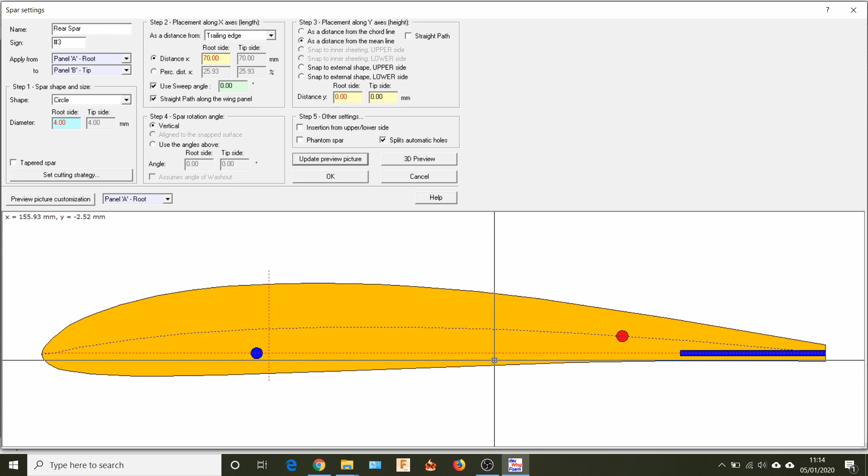So that's all the spars done. So we'll go on to the next section, and this is for ailerons.

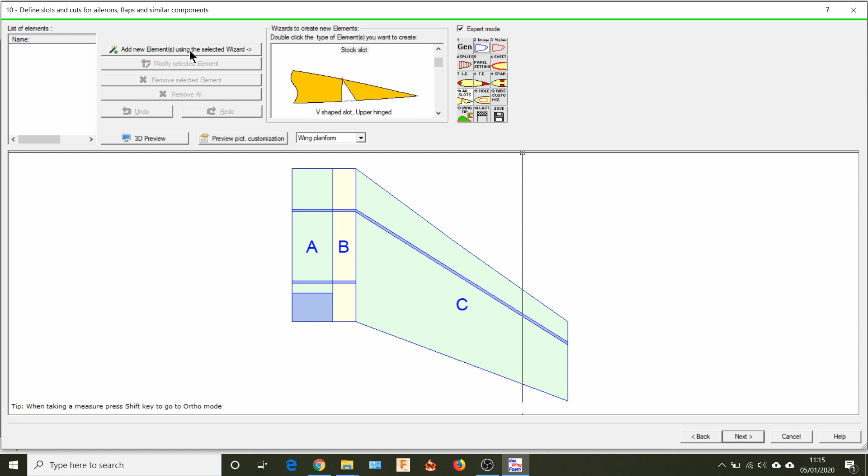So you've got various options there for different types of ailerons. So what I'm going to use here is the V shape. You do this using the wizard. So we add elements using the selected wizard, and we select V shape.

And then we're only going to want the aileron on panel C. So we go panel C root to panel C tip, so we're only going to get it on there, and then it puts some settings in here.

So if we just accept what we've got there, so you can see we're going to get an aileron. I tend, on my flying wings, to like them a bit wider at the tip than the root. Yeah, so I think 40 and 25, yeah.

Root, no, that's 25. And that's 40.

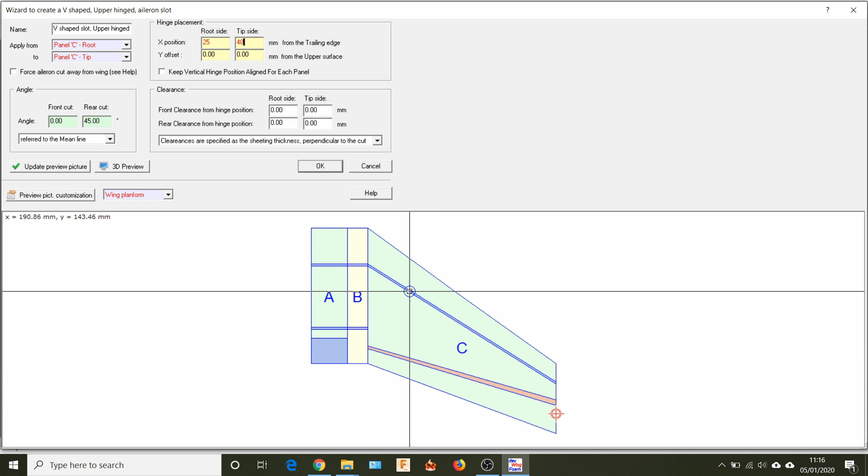There are some guidelines for when you're putting ailerons in. Generally what you need to do is make your ailerons about 12 to 15% of the actual wing area. So let's do that. That's looking a bit better now.

The other thing we've got, if we look at this, we can see I've got our aileron in there. We can alter the angle as well. 45 looks a bit much to me, so I'm going to change that to 30. Click on there, bring that down a bit.

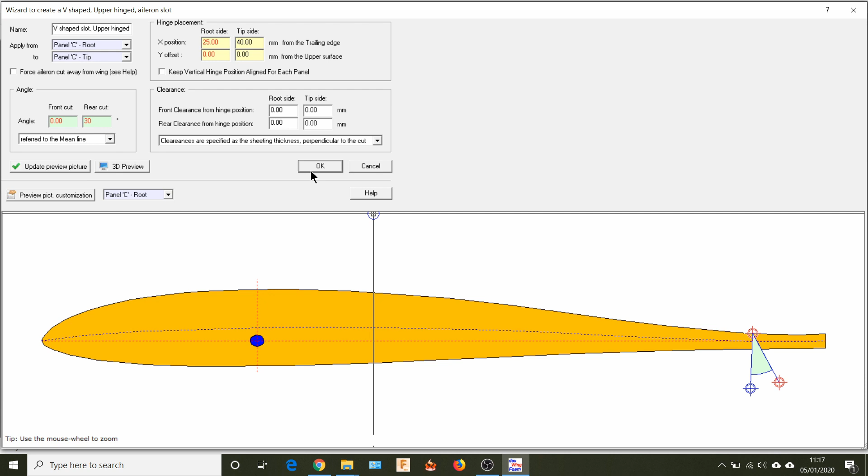What we've got there, 27 wasn't bad, was it? We'll put 30 in. Oh, came out of it, didn't mean to do that. Go back to the tip there.

The other thing is the angle is referred to the mean line, so it will be perpendicular to the mean line or perpendicular to the chord line. There isn't a lot of difference there, but if I change it to chord line, you can see it's just straightened up a bit there. So that's our aileron done.

As you can see, it's quite a comprehensive program, DevWing Foam, and it's got a lot of options in it, but you don't need to use every single option. As you get more experience, you'll start to look at some of the other options. So what we're going to do now is go on to lightning holes.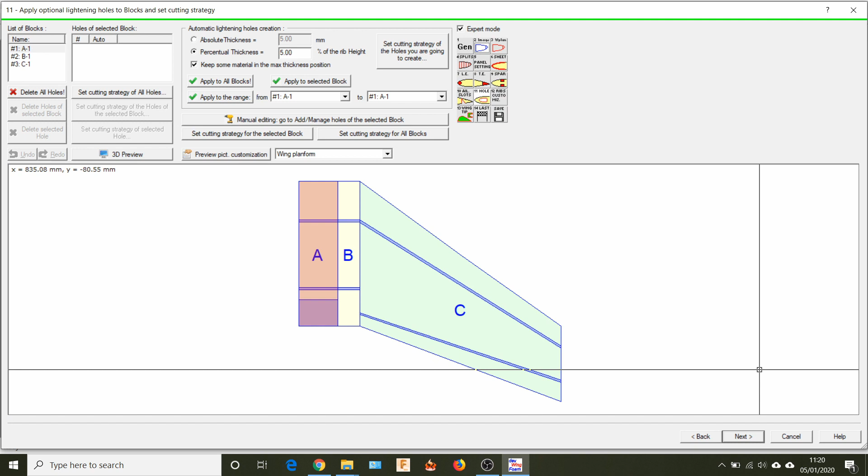This section here is apply optional lightening holes. If we just turn and look at the side at the moment, we're looking at our middle section here. This is going to be where we have some lightening holes to get our battery and flight gear in. What we can do is just let it apply some automatic holes.

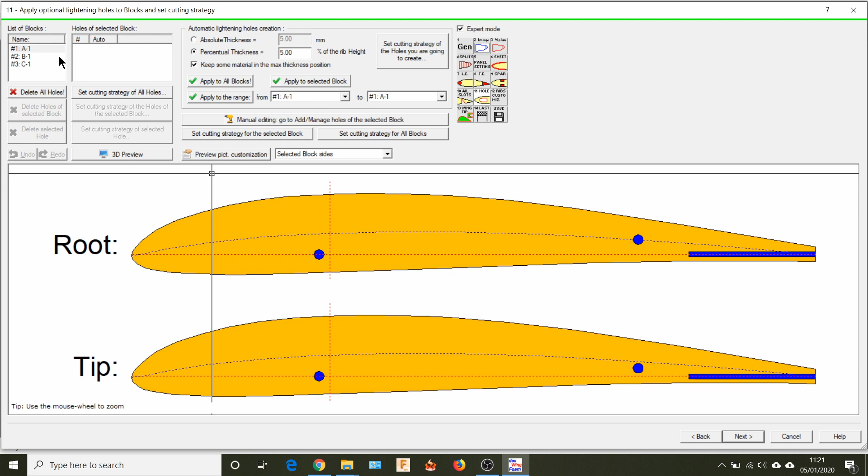All we're going to do at the moment is apply it to block A, which is our middle section. If we do apply to the range, you can see there by default it's put them in. That's probably a little bit thin there, so I think I'm going to change the thickness. That's looking a bit better.

We've just got the two holes here, so our battery goes here. This section gives us a bit of strength, and there's an option to take that off, but because we've got a spar there, it won't take it off anyway. What you can do is, if you've got no spar there, rather than having this as one big hole, you can apply that and it will keep a section in there to keep it a bit stronger.

So that's applied an automatic lightening hole. Say you weren't quite happy with where they were, or you didn't want automatic, you can go into manual editing, and you can start to alter the sizes of these, or add other holes as well.

Say you wanted to add a circle, let's say right down there at the back for some reason. Then we can alter the size there, so let's just do 6 mil. And that's made us a small hole there.

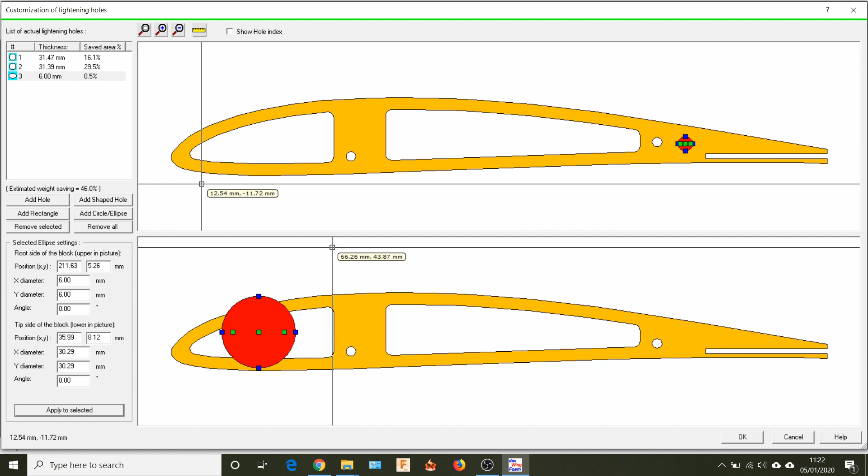We've got various options there. We can add rectangles, ellipses, so we can add all sorts there. But we don't actually need that one there.

The other thing we've got here now is set the cutting strategy for the holes. We can do it on the selected holes, or set the cutting strategy of the holes of the selected block, or do it all. I'm just going to do it on this one since we've only got holes on that block.

What I'm going to do here, I want this to come in from the top with the wire, so I'm going to select that option. So what that's going to do then is cut from the top there. We're going to want some access into here, so cutting it from the top is going to work out quite well. So let's have a 3D preview of that.

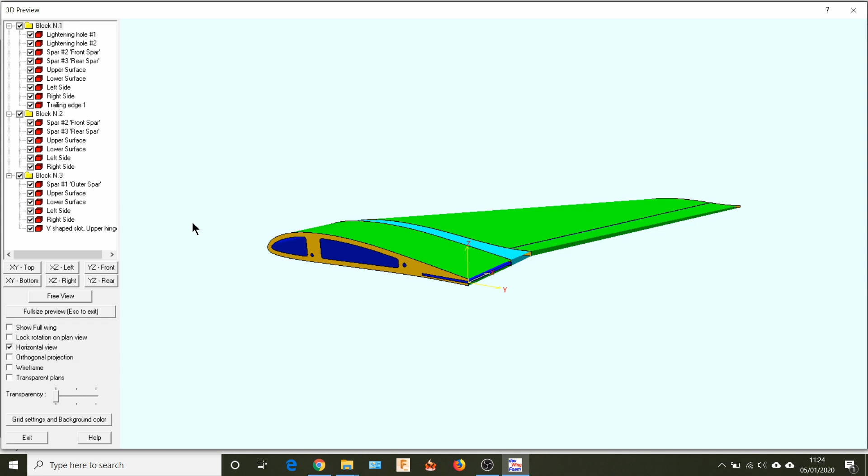So you can see now we've got a hole in there. I have measured this out, and a 3000mAh 3S lipo should fit in there okay, going across, and then we can get flight control and receiver and that in there as well.

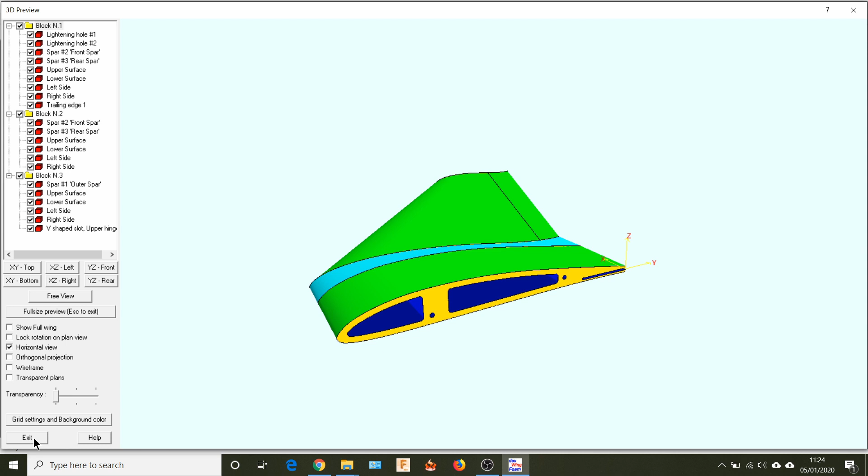Yeah, so that's looking pretty good. I think that's about all we need. There's a lot of setting cutting strategy here, but when we get on to the next video, we'll go into that more, and we can see where it's actually going to be cut, and we might have to come and alter that.

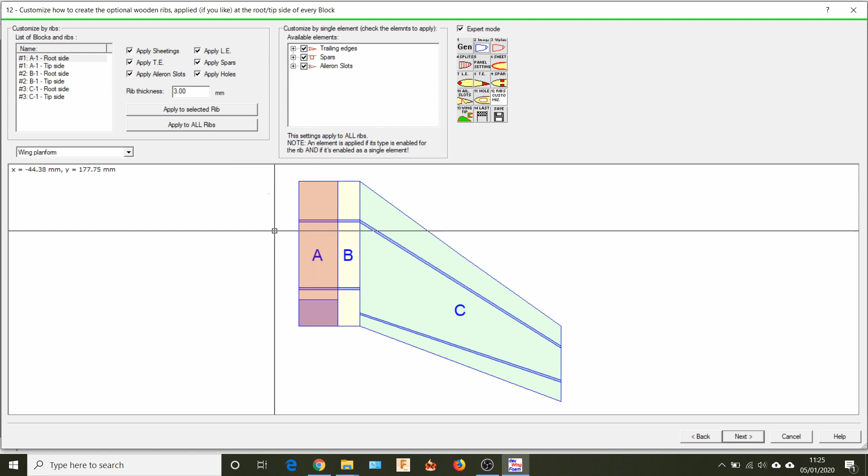So this is really if you've got a CNC router and you want to cut some wooden ribs to place in between the foam. I'm not going to cover that on here because I'm only going to cover using a foam cutter. But what you can do is you can get it to cut this out with a CNC router if you wanted to, but we're not going to.

And these here, nose checking templates, that's to help with building as well. I've never used these, so I don't need to use them much.

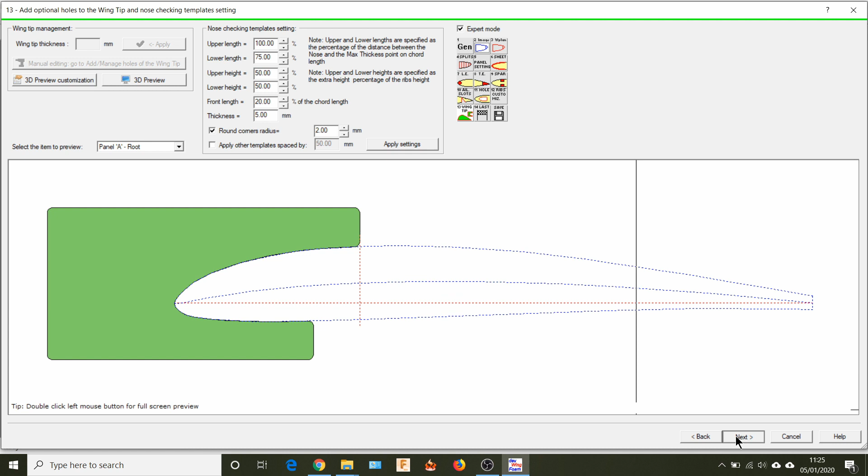So this is new in DevWing Foam 2.

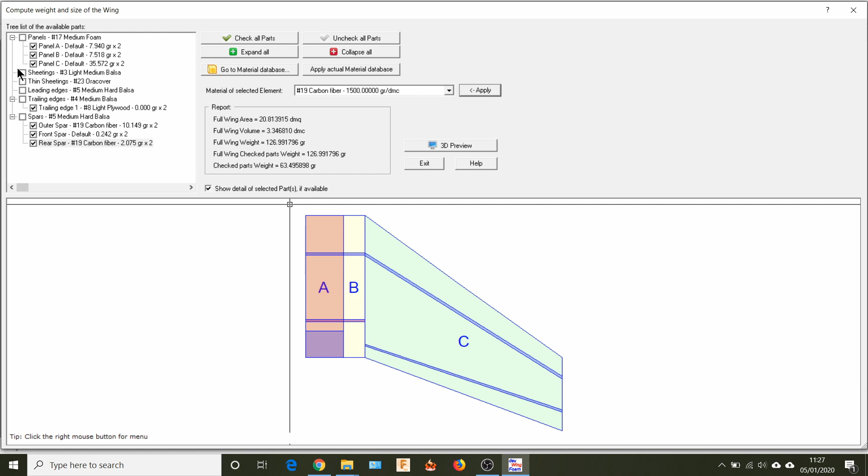So we're not using the leading edges, we're not using any sheeting. So what it's saying to us is that our wing should come out at 63 grams. So when we actually build it, we'll check that. So this is just the half wing - that'd be quite interesting to see if it actually does come out that way.

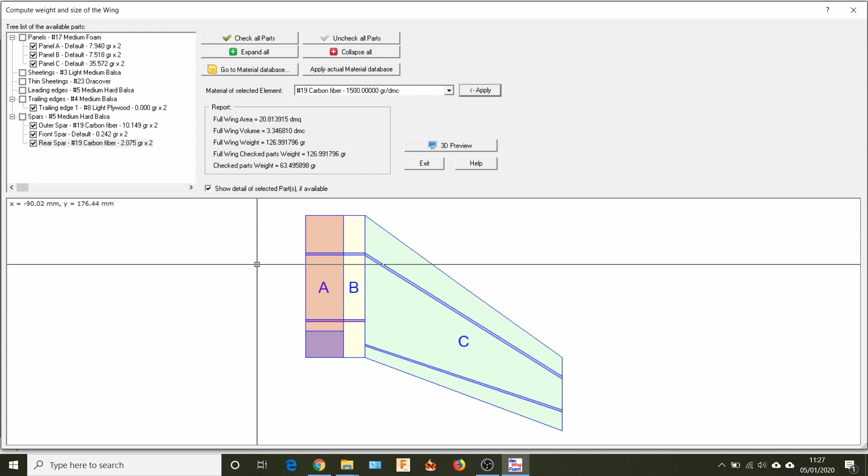And if we do a 3D preview now, and we'll put the full wing on, so we can see we've got our spars. So if we take the upper surface off, do it on all of them.

So this is how our wing's gonna look. I'll probably actually make this center section as one piece rather than doing it in two halves. Just make it a bit easier to cut, but it won't make any difference to the cutting anyway, because this section's straight anyway.

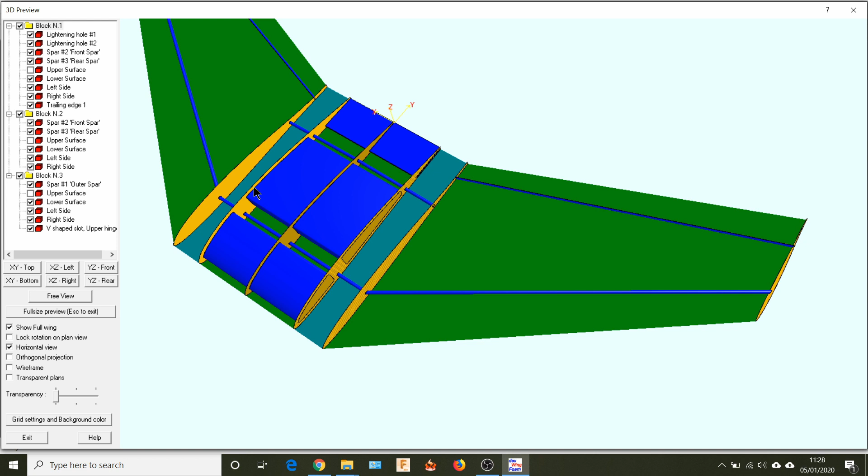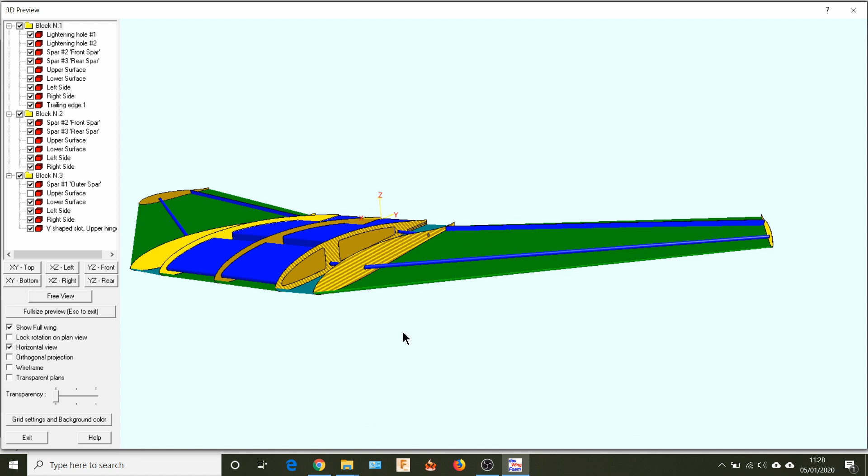So we've got our ailerons there. We're probably going to have to put some carbon in the back here to strengthen them up. And I'm probably just going to make this in normal white styrofoam - oh, I think black, I think I've got some black styrofoam. I'm finding I'm getting a few issues with using XPS foam, it causes me a little bit of problem, so I've decided just to do everything now in white styrofoam.

And then the wing, I'll probably cover in my favourite method, which is brown paper, which makes them really strong. And it'll just be one solid wing. I'm not going to try and make it in separate parts so the wings come off. So it's not going to be a massive wing.

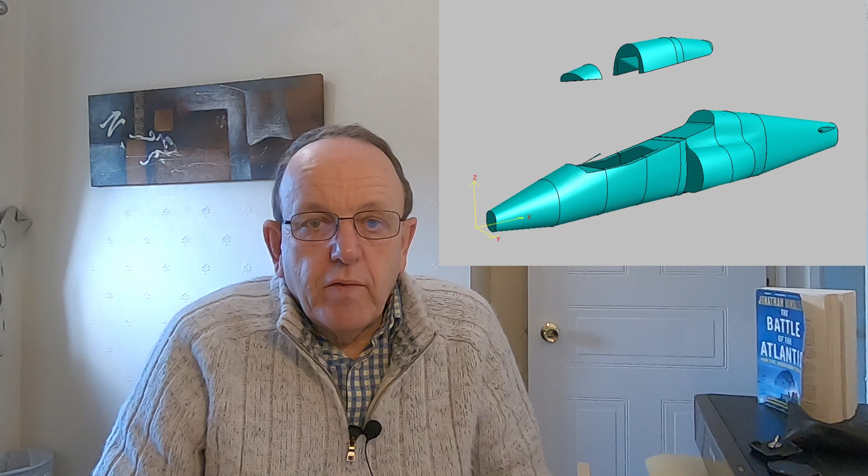So that's the design finished of our project - that's the end of the design phase of DevWing Foam. What did you think? Personally, I think it's the best software for making foam wings. There's some great models you can buy, but they'll be quite expensive, and sometimes you can't always find the one you want. So with the companion program, DevFus Foam, you can almost make any airplane you can think of. And I really enjoy researching the models, it adds a whole new element to the hobby as far as I'm concerned.

I've tried to keep the video as short as possible so it's not too overwhelming. So if you think there's something I've left out, just let me know in the comments and I'll include it in part 2 if it's going to fit in okay.

So in the next video, we'll create the foam cutting project, and that's what generates our G code. And what I'll also do is discuss some of the controllers we can use. There's 4 I'm going to look at - there's 2 paid and 2 free options, and I've used them all. So I'll tell you from personal experience, it's not just research I've done online.